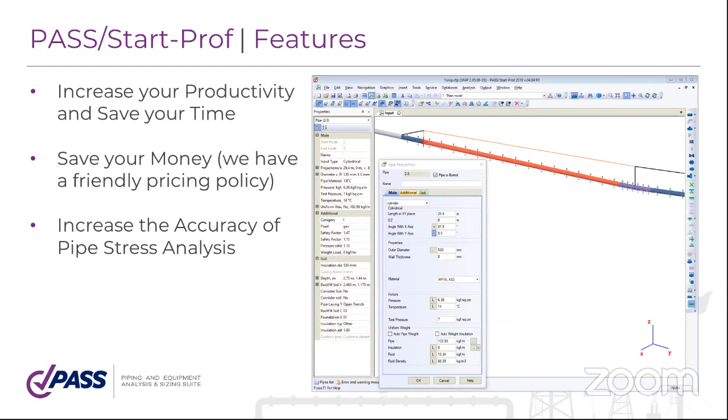PASS START-PROF is very user-friendly software, so it can increase the speed of your design and reduce costs. START-PROF software has been developed since 1965. We have about 2,000 active user companies. The user interface and documentation are in English, Chinese, and Russian. We have 32 piping codes, and 18 codes for wind, seismic, snow, and ice load automatic generation.

These are the main users, the most famous users from different industries, the most famous international users, and almost all Russian companies who design district heating networks and who produce pre-insulated pipes with polyurethane insulation, the manufacturers, including the most known and famous Mosflowline company, use PASS START-PROF software.

What are the benefits of PASS START-PROF? There is direct support from developers via email. The software is very easy to learn, very easy to use, and has a very intuitive, modern, object-oriented user interface.

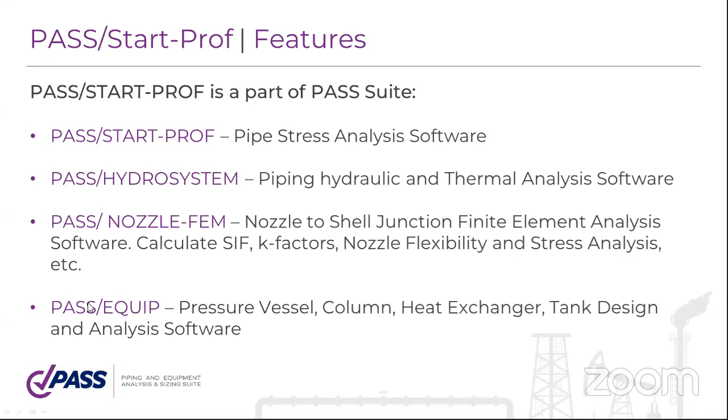PASS START-PROF is part of the PASS suite, which consists of several software products. It's pipe stress analysis software, hydraulic and thermal analysis also used for district heating network analysis, nozzle FEM, and equip for different types of equipment analysis.

PASS START-PROF is very easy to use, as I said, and it allows you to achieve results quicker, and you will spend less time for model creation and analysis of this model.

The codes widely used for district network analysis included in PASS START-PROF software, you can see here in this list. For many years we had the GOST code for district networks. Several years ago we added Chinese codes, and also in this new version we added the European code for district network analysis.

So let me quickly tell you the history of district design in Russia. Since 1965, the Nikolaev handbook was very popular for design of district networks, and it divided pipelines into several sections, like L-shaped loop, U-shaped loop, and Z-shaped loop. So district networks looked like this, as you can see in this picture.

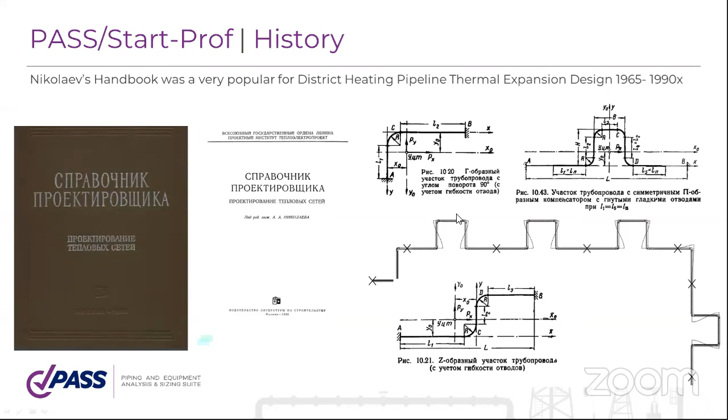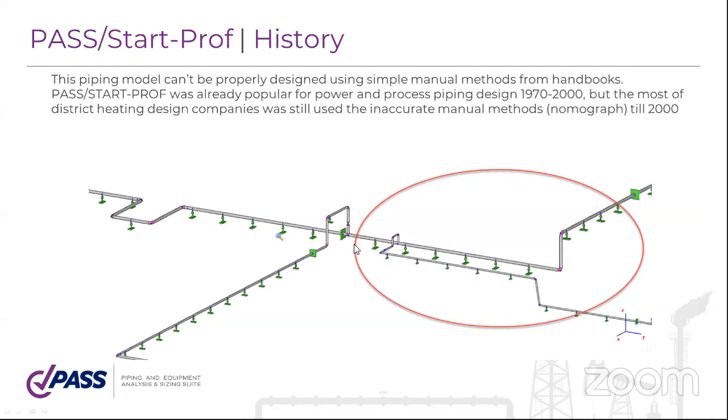Since 1998, directly buried underground pre-insulated pipelines with polyurethane foam insulation began to be widely used in Russia. Also, the Peter Randløv handbook became very popular worldwide since 1997. But complex district systems can't be analyzed using that simple method, dividing the piping system into simple components like U, L, and Z shape loops. And START-PROF software became more and more popular for design and analysis of such systems.

Also, directly buried district pipelines were impossible to analyze using the Nikolaev handbook. Most companies changed their design and used PASS START-PROF software instead. For example, the main problems usually happen with the T's, and some accidents happened too. You can see here how the T works.

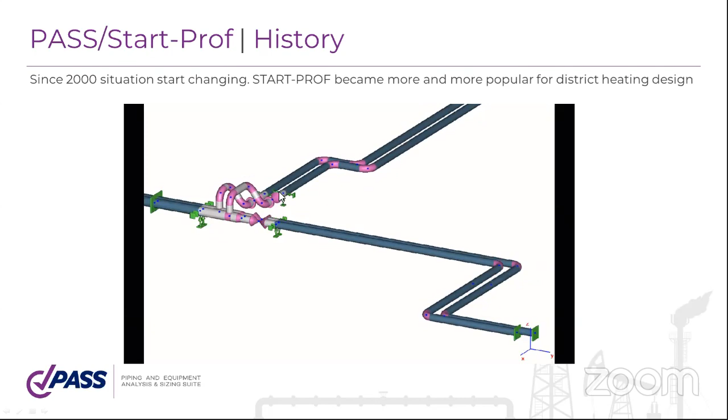This is the underground chamber with the intersection of two district pipelines. This is the stress level, and you can see we have a problem with the T element because the stresses in the T element are great. Simple manual methods can't allow you to check the stress in the T's, bends, and other elements.

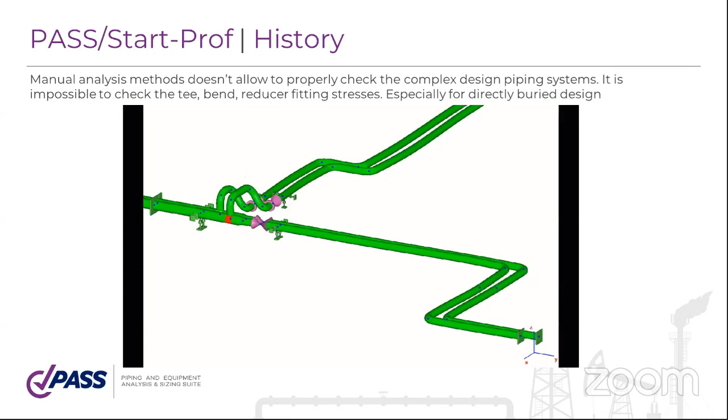And you can't check the fatigue analysis of a district network using manual methods. So some accidents happened from time to time with district networks, and many companies turned to use more accurate computer analysis design, changing their design to use START-PROF software.

Here is the example of the buried district network. In PASS START-PROF software, you can see that the soil is modeled using special soil springs. The underground chamber here has an intersection of pipelines and valves.

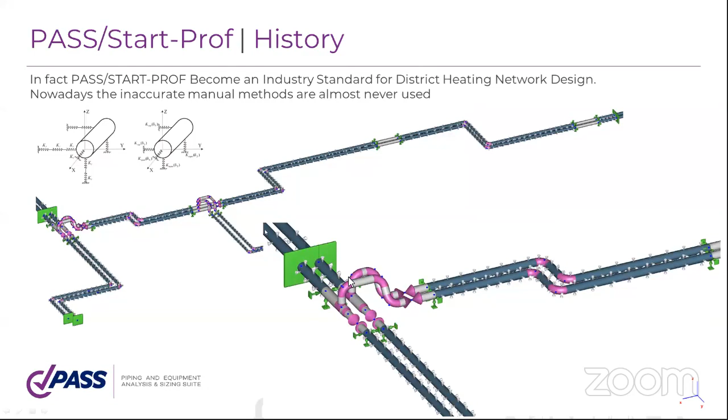There are a lot of district projects in Russia, with diameters from about 200 millimeters to 1.4 meters. Almost all district networks now are designed using the best START-PROF software in Russia, Kazakhstan, Ukraine, and Belarus.

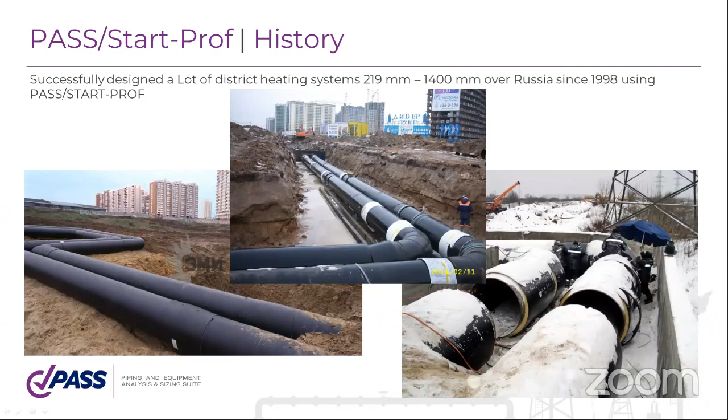Also, since 2015, China joined the society of START-PROF users, and now a lot of district heating projects in China are performed using START-PROF software. Here is one of them.

It is a long district heating network with diameter 1.2 meters, temperature 150 degrees Celsius, and pressure 1.6 MPa.

This is a very long pipeline because power stations in China are usually placed outside of the city. It is not allowed to be placed inside the city, so it is placed outside. That's why the district heating pipelines are very long.

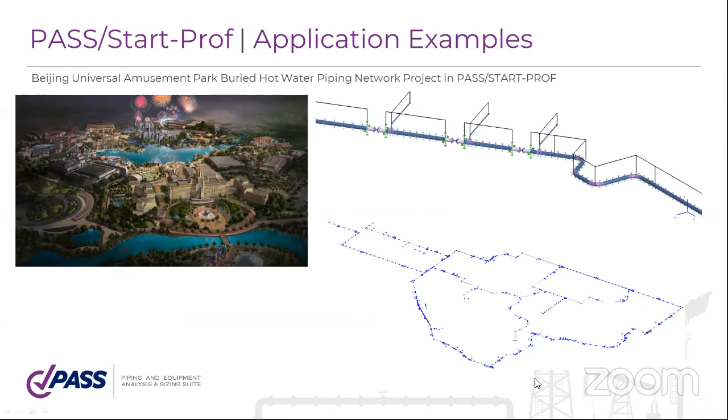Here is another example: the buried hot water piping network project that was done using START-PROF software for the Beijing Universal Amusement Park. Here is that network - it is a very huge network.

So now START-PROF is widely used in more than 800 companies in China, Russia, Ukraine, Belarus, and Kazakhstan for district heating network analysis.

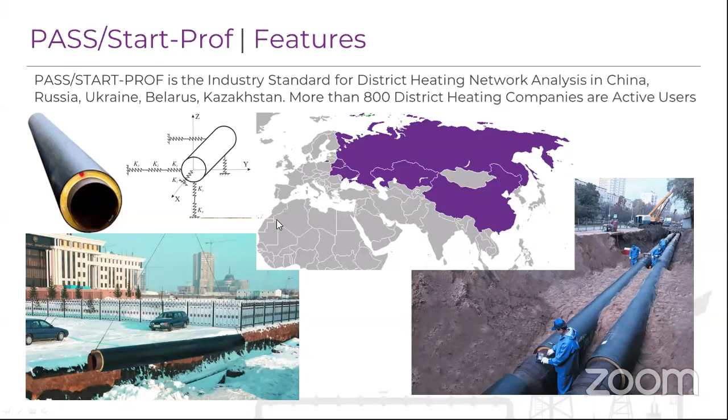START-PROF has all the needed capabilities to design and analyze buried district heating networks. We have special algorithms, nonlinear analysis of gaps, friction, one-way restraints, soil springs - everything that is needed to perform pipe stress analysis of district heating networks.

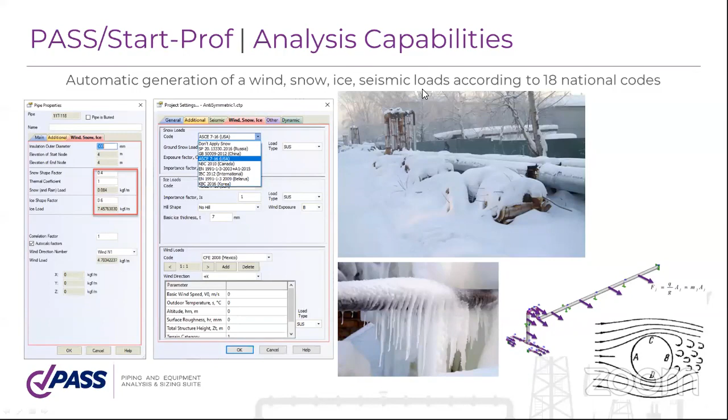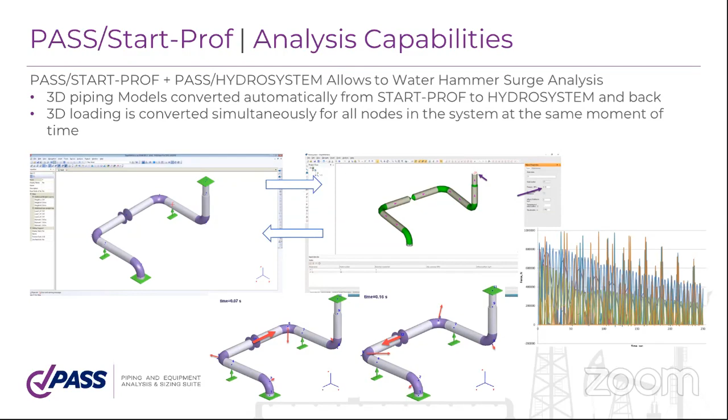We have a special generator of external loads from snow, wind, ice, and seismic effects, due to 18 national codes. Also, with integration with Hydrosystem software, we can calculate hydraulic effects like water hammer.

Let's talk about the buried model used for buried pipeline analysis in START-PROF software. The continuous soil resistance is replaced by discrete springs placed along the pipeline. To save machine time, computer analysis time, and memory, we use a special algorithm that divides the piping system into 3 zones.

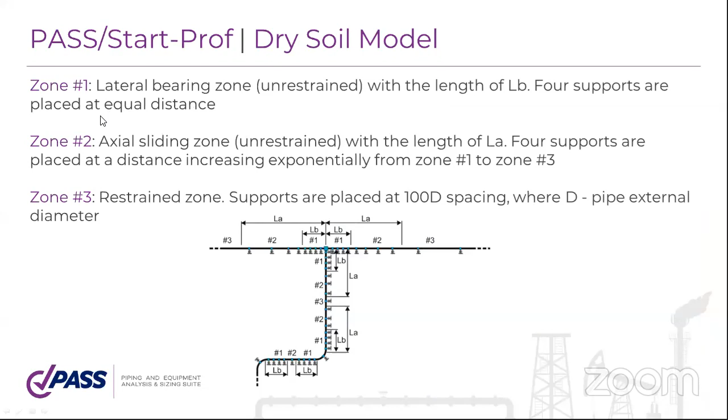The first zone is the lateral bearing zone, where the bending moments are great. The length of the zone is calculated automatically by START-PROF. We place a lot of springs in that zone, so the springs are condensed there.

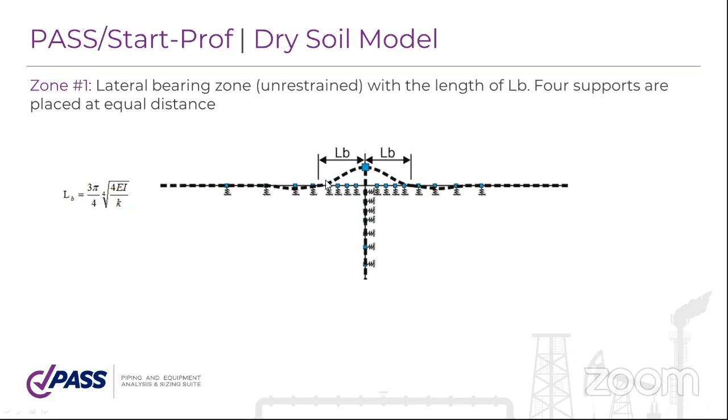The second zone, with less condensation of soil springs, is the sliding zone. START-PROF places fewer springs there, and the third zone is the restraint zone.

But actually in district heating networks, the restraint zone doesn't usually occur, because in the restraint zone, due to the high temperature of district heating networks, the stresses are usually greater than allowable. So the restraint zones usually don't happen.

It can happen only if the temperature is not so high, and special methods like a single-use compensator or preheating analysis method are used. In the restraint zone, the pipe doesn't move - the thermal expansion is zero because it is balanced by the friction forces in the sliding zone, and the pipe behaves like a pipe restrained between two anchors.

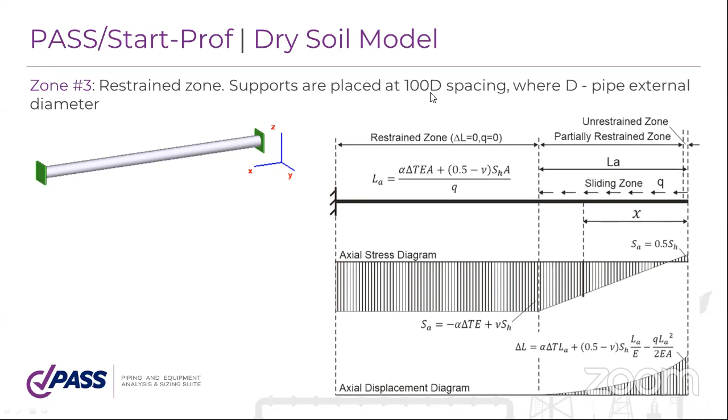In such a type of zone, START-PROF places the soil springs with a distance of 100 diameters.

Also, we have long radius pipe bends. For example, in Russia it is not used for district heating networks, but in China it is very popular because district heating networks are very long and lying near the roads, so they use long radius bends very widely.

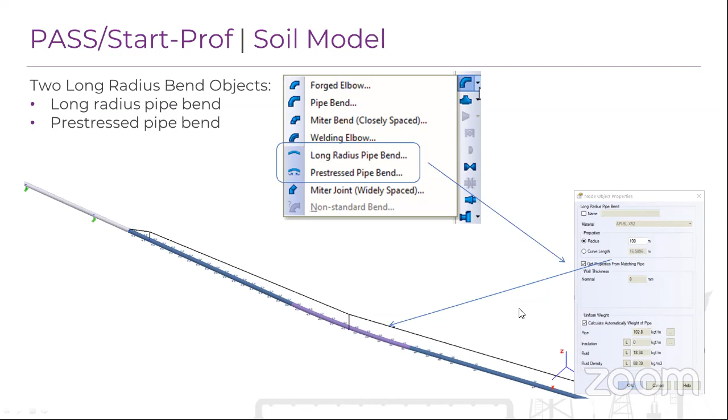We have two types of long radius bends. The ordinary long radius bend can hold its shape - if you place this bend on the ground surface, it will still remain a bend.

But we also have the pre-stressed long radius bend. If you cut this bend from the pipeline and put it on the surface, it will tend to return to its original straight form. So it has initial bending moments inside the bend that try to open it, as you can see in this picture, and this adds additional stresses in such bends.

The soil model, how does the soil spring work? We have three soil springs: longitudinal, vertical, and horizontal soil springs. The horizontal soil spring consists of three springs. First, model the polyurethane foam insulation flexibility. The second spring models the expansion cushion or expansion pad flexibility.

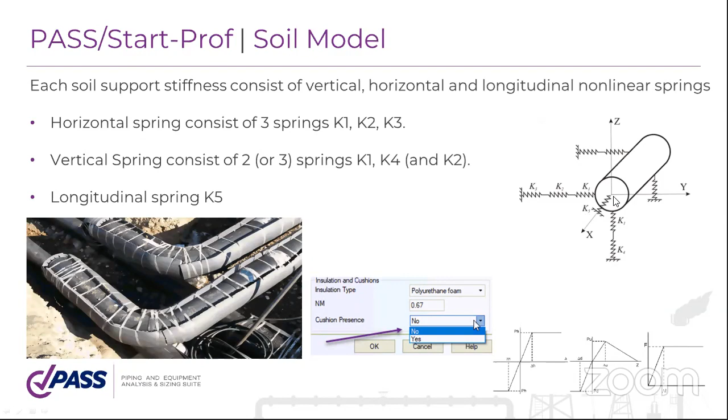In START-PROF, you can just select whether you have the cushion on this pipe or not, and START-PROF will add this spring if needed. The third spring models the horizontal soil resistance. The same situation is for the vertical spring. The axial spring doesn't have the polyurethane foam flexibility; it is just the soil flexibility along the piping, along the pipeline.

START-PROF automatically calculates the polyurethane foam insulation flexibility and automatically calculates the expansion cushion flexibility, so you don't have to care about it. You just need to select which type of insulation you're using, and whether you have the expansion cushion on this part of the pipe or not.

And about the soil model, this is the axial soil spring property that is used for modeling of the soil spring. We also have another model for district heating networks.

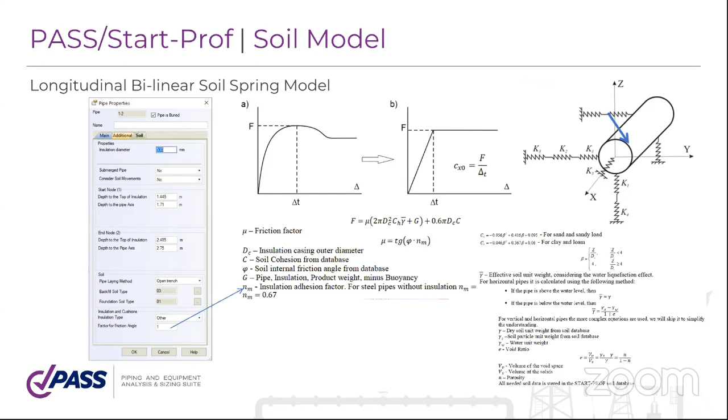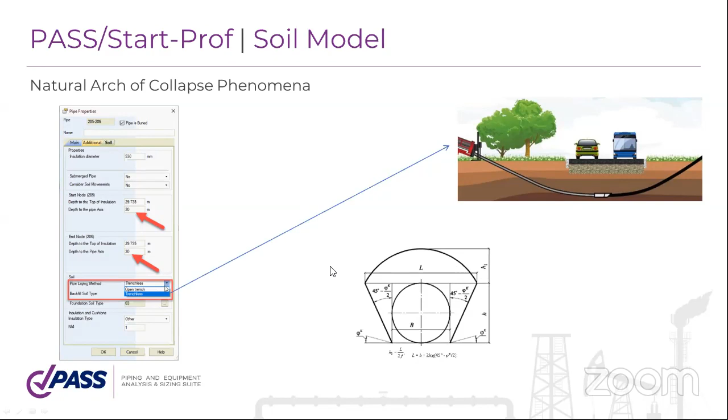START-PROF also allows you to choose which type of laying you're using: is it open trench or trenchless? If you're using the trenchless method, like horizontal directional drilling, START-PROF will also consider the special natural arch of collapse phenomena about the pipeline. This is the properties of the horizontal soil spring.

So then the pipe goes up and gets out of the soil, the soil resistance becomes 0.

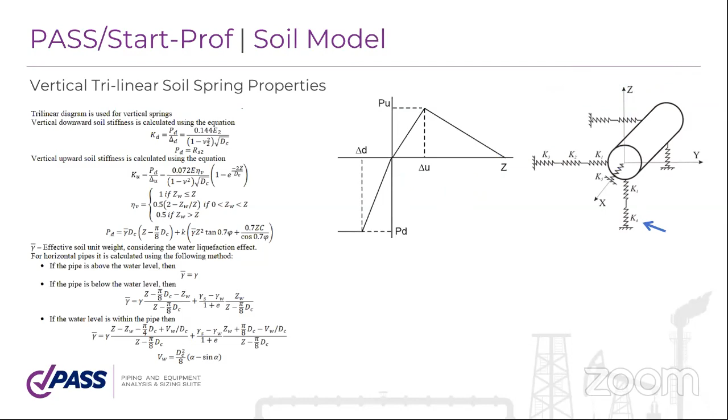START-PROF can analyze pipes with different soil depth on the two ends of the pipe. So you can specify the depth on one end and the second end, and START-PROF will model it automatically. It will calculate the properties of each soil spring automatically depending on the individual depth for each soil spring, including the vertical pipes.

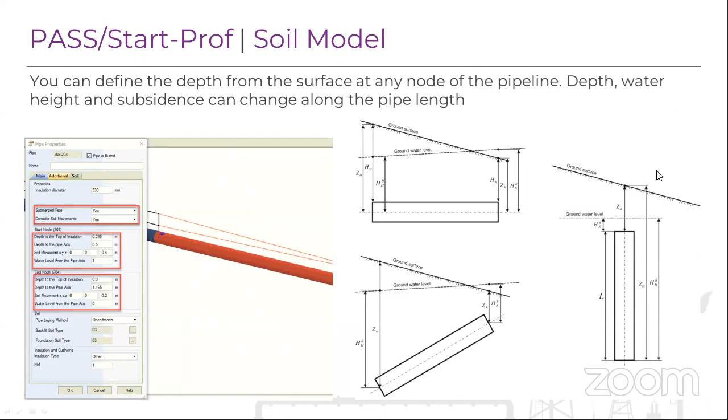Also, START-PROF model allows you to model the pipe with any angle from horizontal to vertical. It automatically converts the soil properties to model inclined pipes and vertical pipes. Most soil models are usually designed only for horizontal pipes, and some of them don't have the properties for vertical springs. So START-PROF includes a soil model that has this ability.

In one model, you can analyze both the above ground and underground pipelines in the same model, and it can consist of inclined pipes and vertical pipes, no problem. So you just need to draw your piping system, your district heating network with above ground pipes and underground pipes, and START-PROF will automatically analyze it.

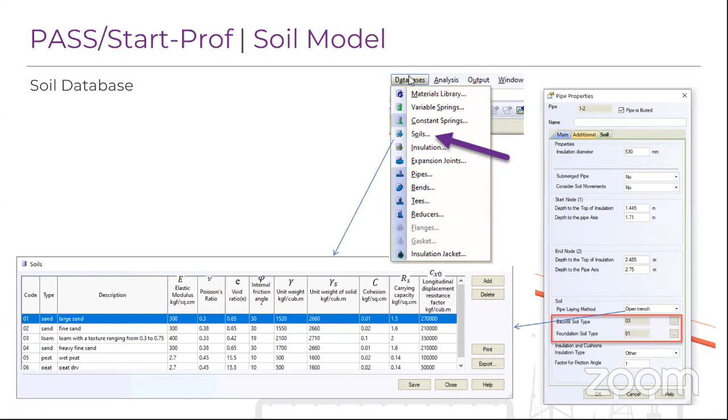START-PROF has a soil database that contains soil properties, and also has sand properties that are usually used in district heating networks.

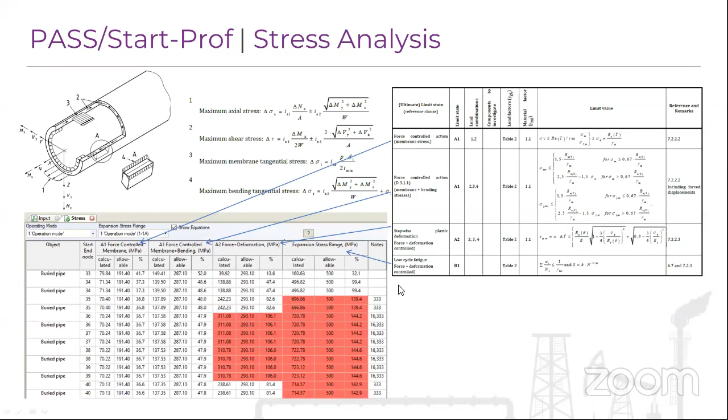Load cases are created automatically for district heating networks, so you just need to draw your piping model and run the analysis. START-PROF also checks the buckling effect according to European code, and offers you the buckling check report for all the pipes in your system.

START-PROF has the ability to enter the number of cycles for different types of pipelines: transmission, distribution, and house connections. You can enter the number of cycles, and for each pipe you can specify the type of pipeline - is it transmission, distribution, or house.

So you can analyze the whole district heating network that can include all types of pipelines: houses, distribution networks, and transmission networks. You can analyze everything in one model.

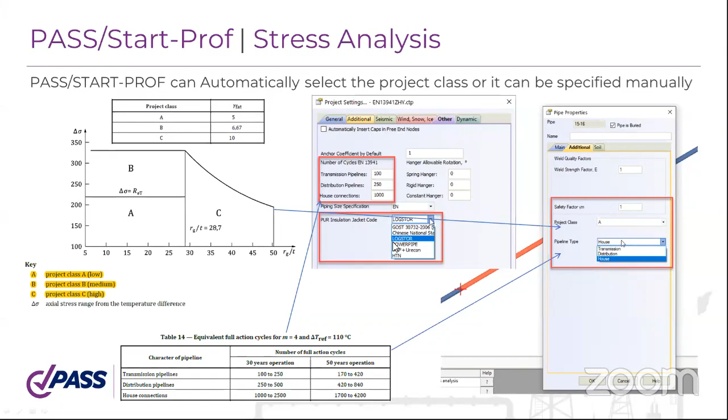START-PROF also has a database with polyurethane insulation pre-insulated pipes according to standards and manufacturer catalogs from different manufacturers: the GOST Russian catalog, Chinese national standard, and the popular LOGSTOR, POWERPIPE, and other standards.

START-PROF can analyze the ring bending stresses in the pipeline.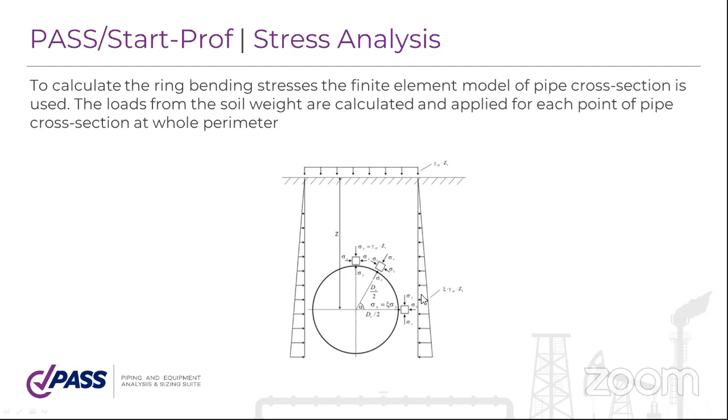To do this, Start-Prof calculates the loads from the soil pressure over the pipe perimeter, and creates a special finite element model of the pipe cross-section with the loads applied around this cross-section. This cross-section also includes the polyurethane foam insulation layer around the pipe, and it automatically considers the pressure stiffening effect, so this finite element model is nonlinear.

When the internal pressure is very high, it tends to open the pipe, making it tend toward a circular cross section, and if the pressure is zero, it became elliptical. This effect is automatically considered too. Here you can see the bending moments diagram in the pipe cross section, and this is the iteration process. How are the iterations done inside Start-Prof?

You can see here that some springs are switched off. The soil is modeled using special springs around the pipe cross section, but those springs should work only for compression. The compression happens in this zone - this is the compression zone, and this is the tension zone. In this zone, the soil springs are automatically switched off.

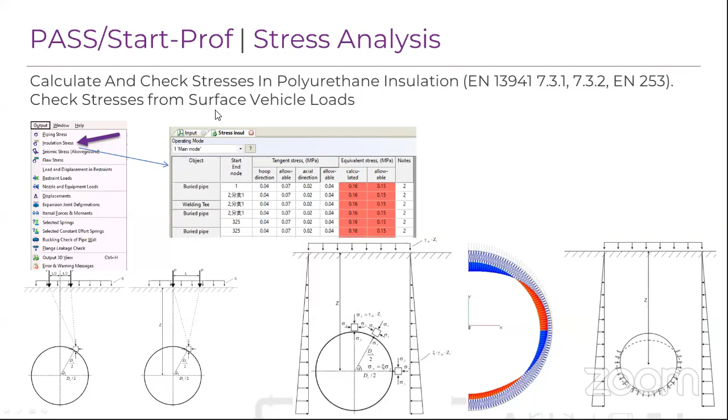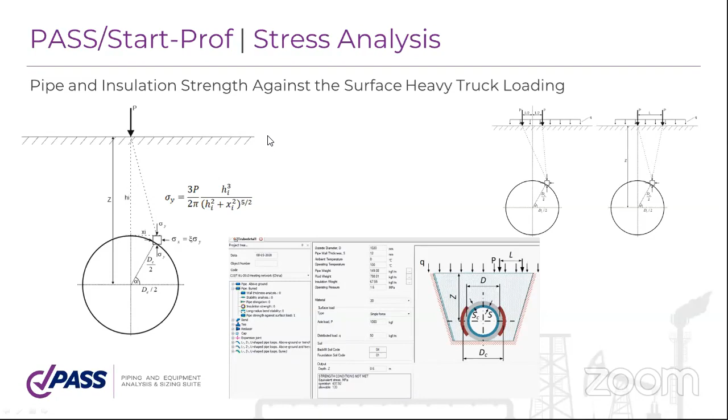Also, Start-Prof can analyze the pipe and insulation under external loads on the ground surface, for example, from heavy trucks above the pipe.

Also, Start-Prof can take into account preheating and the single-use compensator. We have a special option where you can just select which type you have - preheating or single-use compensator - so it's very easy to use. And also Start-Prof can calculate the distance between the single-use compensators.

So let me demonstrate it in the Start-Prof software. I just open Start-Prof. Here are some examples of district heating networks in Start-Prof.

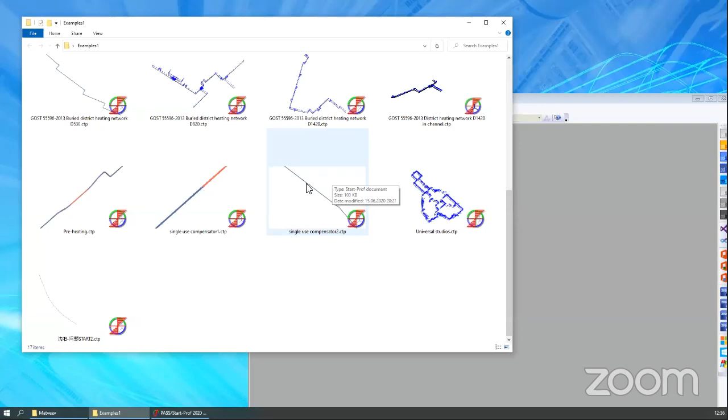Let me show you the single-use compensator model. This is a very simple model, very simple model. I choose the European code for the district heating.

I choose the single-use compensator. At this temperature, we lock this expansion joint, we weld it, and it is not working anymore after locking it.

So let's perform the analysis of this system. You can see the soil springs along the pipeline, and you can see the stress table. The stresses, according to the European code, are okay, no problem.

You can move your mouse over any cell like this, and you will see all the equations used according to the European code to calculate the stresses, and expansion stresses. So you can check all the calculations manually if you want. If you have any problems here, Start-Prof will draw this cell using red color.

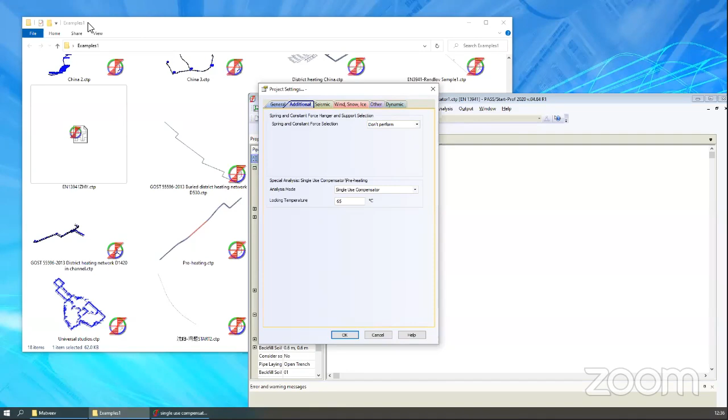Check report - here is the buckling check. Everything is okay here too, no problems. And this is the expansion joint deformations. You can see the axial deformation and allowable deformation of this single-use compensator.

So let's remove the single-use compensator here. I will remove it from this model and run the analysis again without the single-use compensator. Now you can see that we have problems with the stresses. Let's check buckling - we have a problem with buckling, so the single-use compensator helps us a lot.

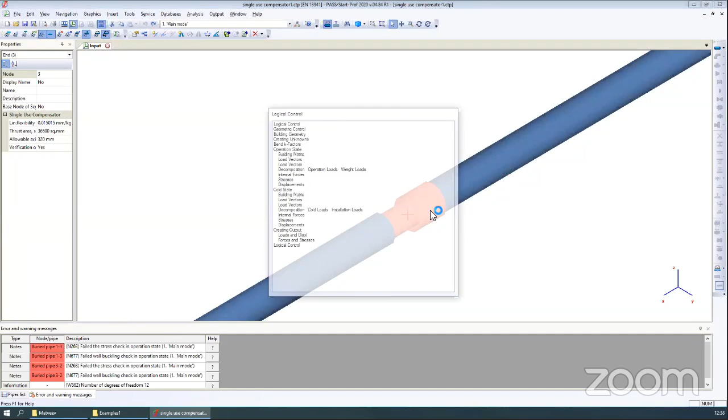Also, I undo changes, bring back the single-use compensator, and let me change the locking temperature. I can change it from 65 degrees to, for example, 20 degrees. Run the analysis.

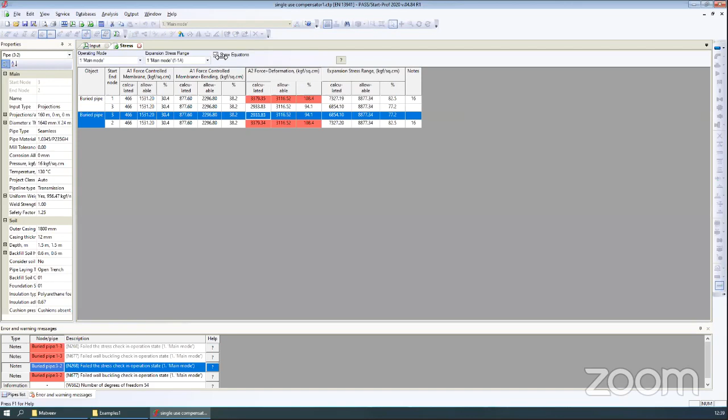And you can see that we also have some problems with stresses. So the locking temperature should be the temperature between the installation temperature and operation temperature, divided by 2, like this. This temperature is the locking temperature of the single-use compensators.

Another example is a preheating analysis. This is the sample model that can demonstrate how to perform the preheating analysis. Here the preheating method was chosen.

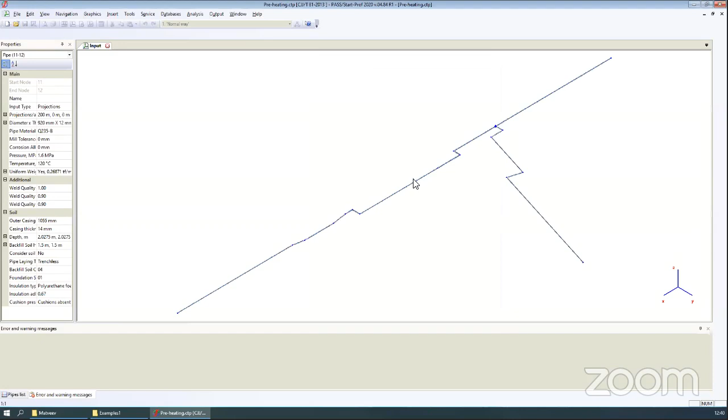And in the operation mode editor, we have two operation modes. The first mode is without preheating, and the second mode is with preheating. There is no preheating here, and here is preheating. We can compare the two modes and compare the results. The analysis is already done, so I will just show you the results - this is the stresses. Oh, they were cleared, so I need to run the analysis.

Okay, analysis is done. This is the deformed shape of this pipeline. This is the first one, analyzed the normal way without preheating. You can see the installation state, operation state, and cold state.

Now if I change the mode to preheating, you can see different results. This is the installation state, operation state, and cold state. As you can see, the difference between this preheating case and the one without preheating.

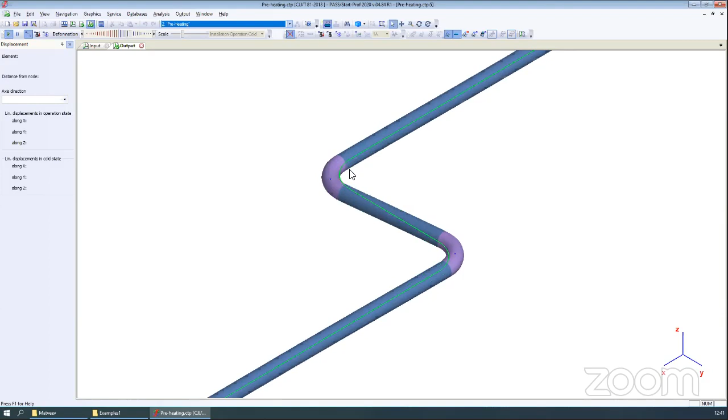The difference is significant, so all models are calculated with preheating. Now let's check results. Here is the normal way - we have a problem with stresses, and also a problem with buckling stresses. But if we change to preheating, all the problems are gone.

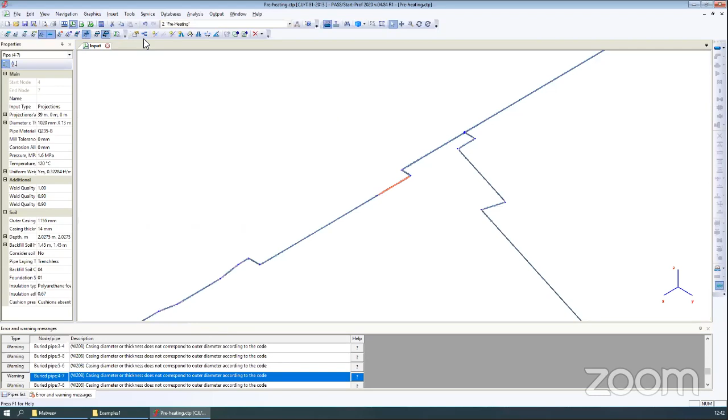No problems now. Let's check stress in the normal way - we have a problem. With preheating, no problem. So preheating helped to reduce the stresses and support loads in the piping system, and it is very easy to activate in Start-Prof.

Let me show you another example - this is the Universal Studios in Beijing heating network, Beijing, China, for Universal Studios Park. It is a very huge heating network.

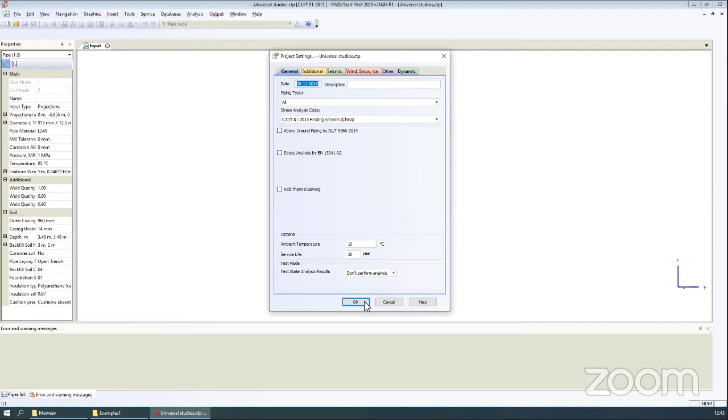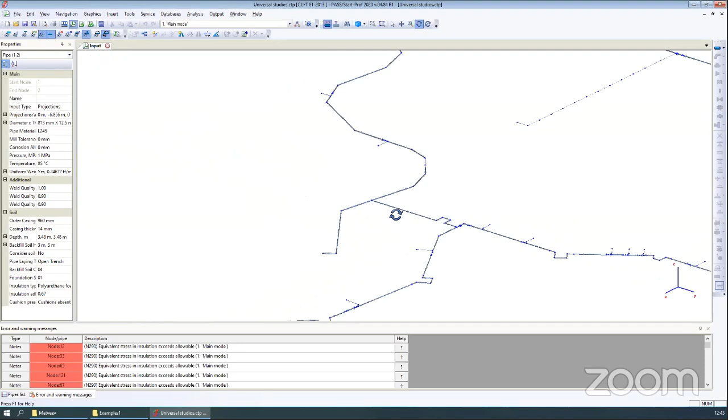Okay, this is the heating network, very huge. You can see the expansion joints here, expansion loops here, the valves. This is not the final results in the final system - connections like this were used everywhere, but this is just intermediate results. Connections like this are not working for district heating networks, so this is not the final version of this network.

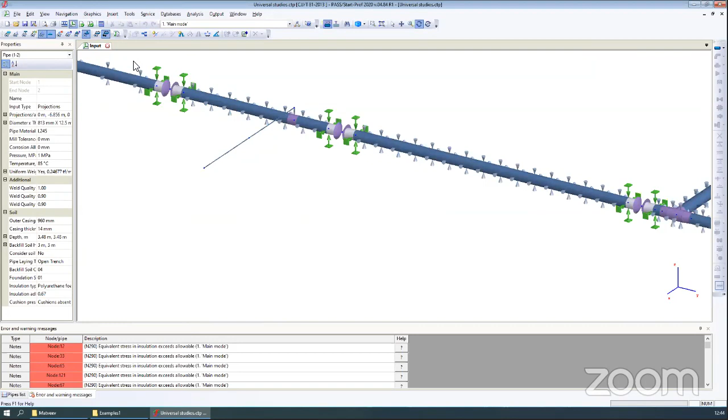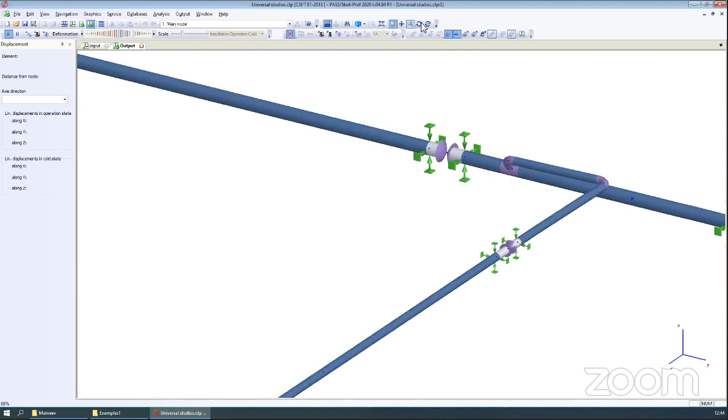We turn to that type of connection at every point. Let's also check the deformed shape of this network. I remove the installation state line, and we can run analysis - this is the deformed shape of that district heating network.

We can also check the insulation stresses. They are not passing right now because, as I said, this is not the final version of this model. In the final model everything is okay, but here we have a problem with equivalent stresses in insulation.

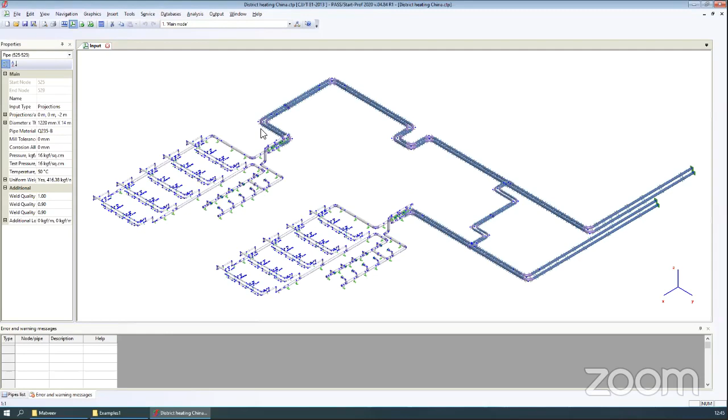We have a lot of other examples - let me show you just one more. This is the district heating network pump station in China, analyzed using Start-Prof software. Let me show you the soil surface above the underground part.

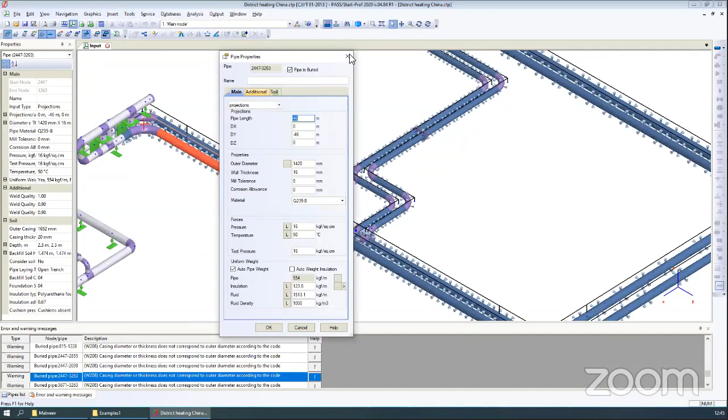And this is the above ground part - the pump station. There are a lot of pumps here. Let me show you the diameter of this pipe - you can see the diameter is 1.4 meters, a very huge diameter pipe.

It was analyzed using Start-Prof, and the cross sections are done automatically in Start-Prof. Now I will show you the deformed shape of this hidden system.

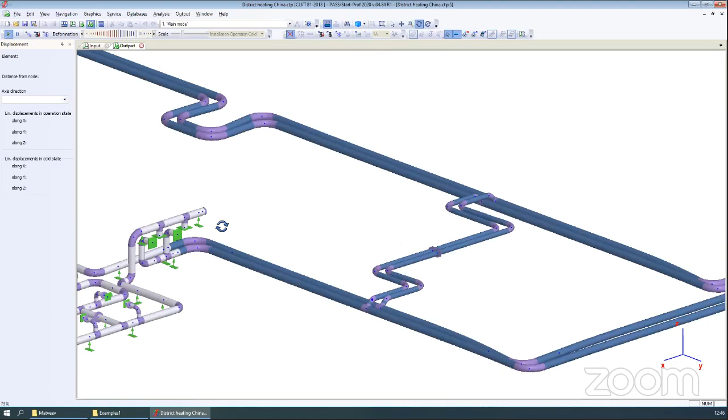This is the pump station, and this is the underground network. This is not the final model - in the real model we have a very... I don't have the final model of this piping system.

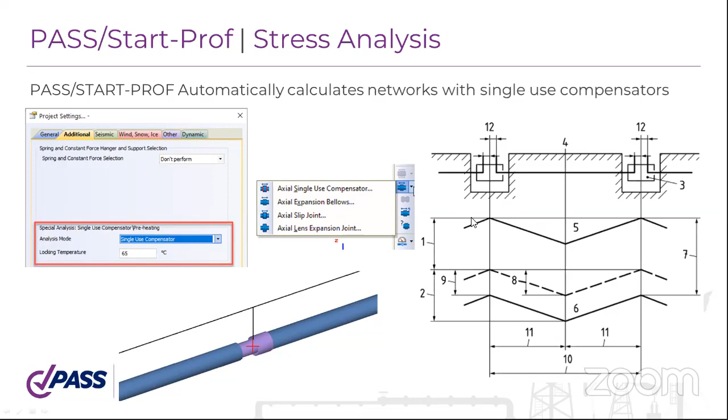Okay, let's return to our slideshow. Here is the diagram of the stresses or axial forces in the pipeline, then using single-use compensators, and the diagram when we use preheating.

Also, Start-Prof automatically uses full friction for hot load and half friction for cooling. So we automatically analyze it, and this adds an additional safety margin because the expansion stress range becomes greater.

And Start-Prof automatically calculates the cold state. For example, we have installation state, operation state when the pipe heats up, and when the pipe cools down it never returns to the original installation state because the friction forces change direction. In cold state we will still have very huge friction forces, especially for buried piping systems, for underground piping.

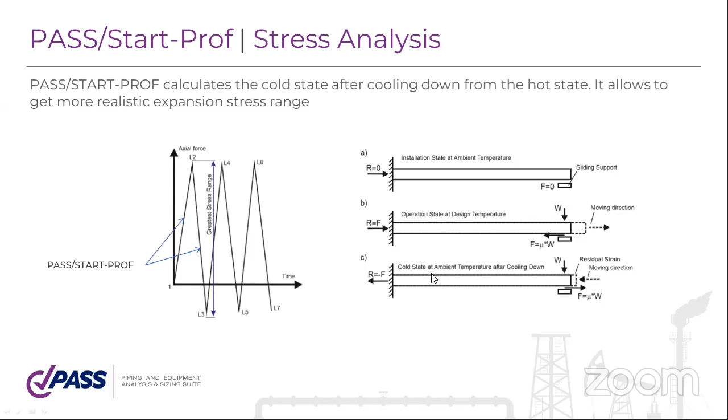This is very important to calculate the accurate stress range, so Start-Prof does this automatically, and this is especially important for district heating networks. This is the expansion range between installation state and operation state, and this one is the expansion stress range between cold state and operation state, which is the greatest. So we need to consider the friction forces in the cold state of the piping system.

We have a database with insulation diameters of the most famous manufacturers of district heating pipelines.

Like the Russian GOST code, because all the manufacturers in Russia follow the GOST code. The second one is China's national standard. And the next one is LOGSTOR, POWERPIPE, and others.

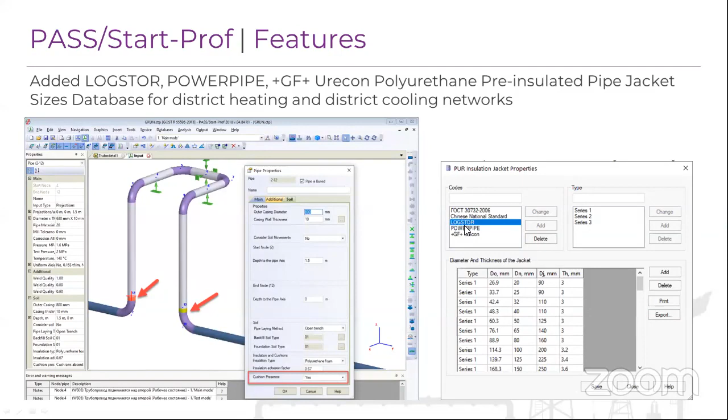We have a material database that includes all the European materials, including the materials used for district heating network design. This database contains the properties of the material depending on the wall thickness that is required by the European standards. So Start-Prof will automatically select the appropriate material properties depending on the wall thickness. You don't have to do this manually. Just select the material and select the manufacturing method, seamless or welded, and Start-Prof will automatically consider everything else.

Also, Start-Prof can analyze some special effects like soil subsidence, landslides, and seismic fault crossing. This was very important for China because there are a lot of seismic zones and district heating networks cross those zones, so Start-Prof allows you to do that. You can define the soil movements at the beginning of the pipe and at the end of the pipe in any direction, and use it to model the effect that you can see here.

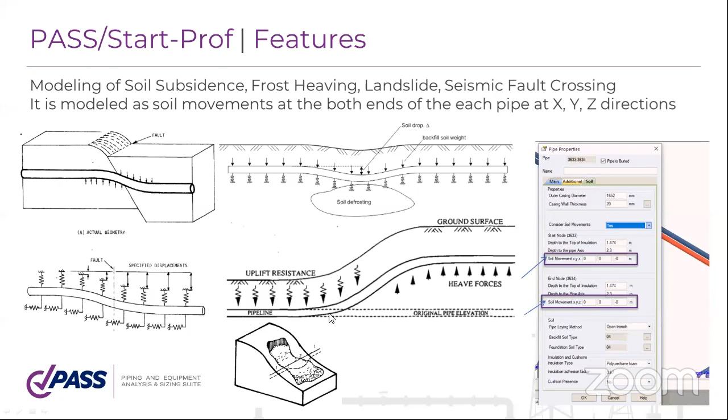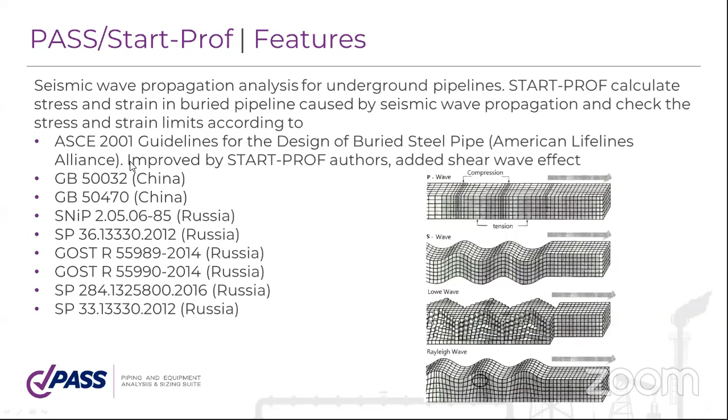Also, in the latest version, Start-Prof can analyze the seismic wave propagation effect according to several standards, including the Chinese standards, United States standards, and Russian standards. You just need to select the seismic analysis and select the buried pipeline seismic analysis. So Start-Prof can now perform the seismic analysis for buried pipelines, for underground pipelines. You just need to select the standard.

What is the wave propagation effect? When you have a long pipeline, the P wave, which is a longitudinal seismic wave, passes through the soil and causes forces in the pipeline. It has compression zones and tension zones. The friction forces between the pipeline and the soil reduce this effect, making it much better. Start-Prof uses these equations to calculate the strain in the pipeline during the seismic wave propagation.

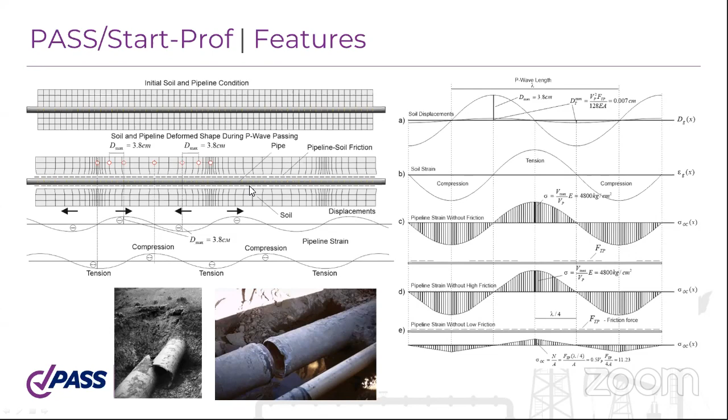Especially the most important points are the branches of the pipeline, because the branches can't slide along the soil. The friction forces can't help, and it moves along with the soil during the passage of the seismic wave along the pipeline. So most of the problems happen in the branches. Start-Prof allows you to design the branch which will hold against the seismic wave.

This is the method used for seismic wave analysis. You can specify the peak velocity value, peak ground acceleration, apparent propagation velocity of the P wave, and of the S wave. How to define these values, you can find in our help system. You can just open our help system and find the answers to your questions there.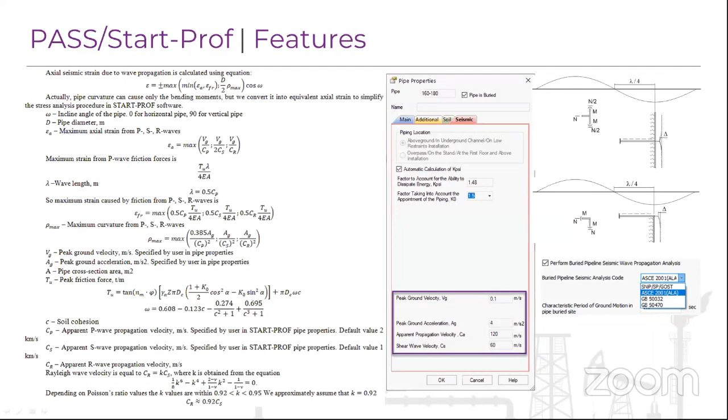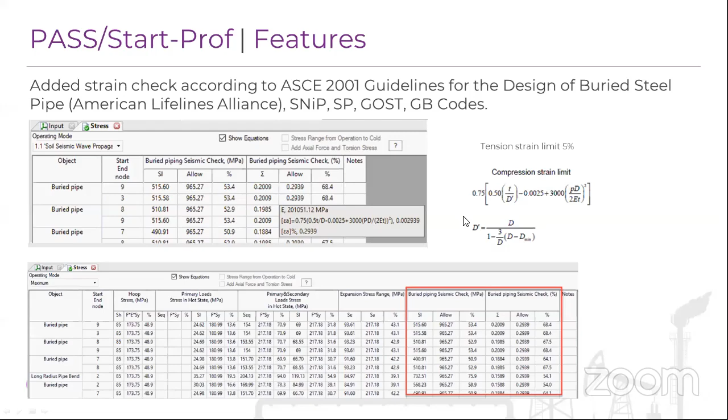After the analysis, START-PROF allows you to automatically check the strains in your pipeline according to several standards. So if you choose the ASCE code, START-PROF will check using the ASCE code. If you choose the Chinese or Russian code, START-PROF will use those codes for checking the seismic wave propagation effect.

Okay, so now let's talk about START-PROF usability. The START-PROF software is object-oriented, and you can build your piping model from objects like Lego. The objects can be pipes. For pipe objects, you can define different coordinate systems. It can be projections, or it can be a cylindrical coordinate system that is more convenient for use in district heating networks.

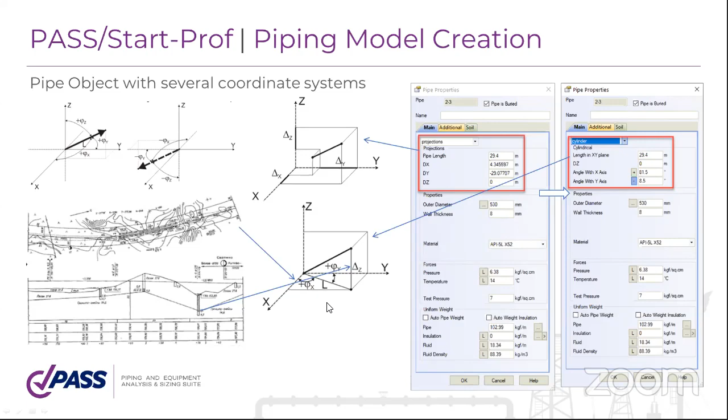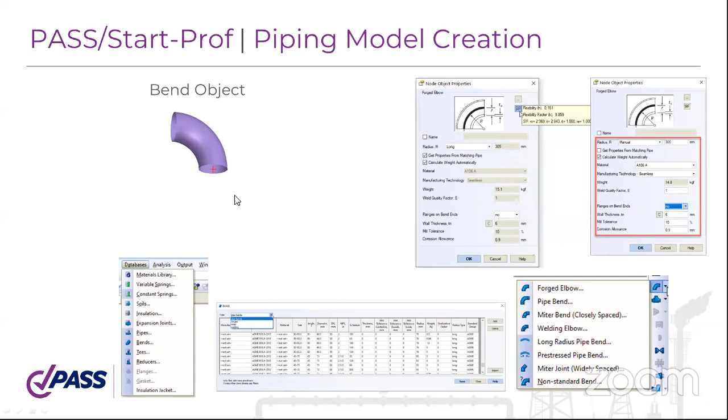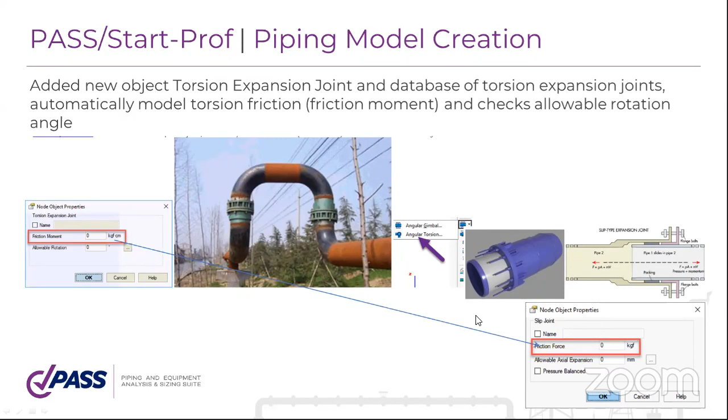You can also select any type of object, for example a bend object, and put it in the START-PROF model. We have tee objects, reducer objects, valve objects, pump objects, expansion joint objects. A special type of expansion joint is the torsion expansion joint with friction moment, and the slip joint with friction force, which is widely used in district heating networks. We also have a flange object that automatically checks flange leakage.

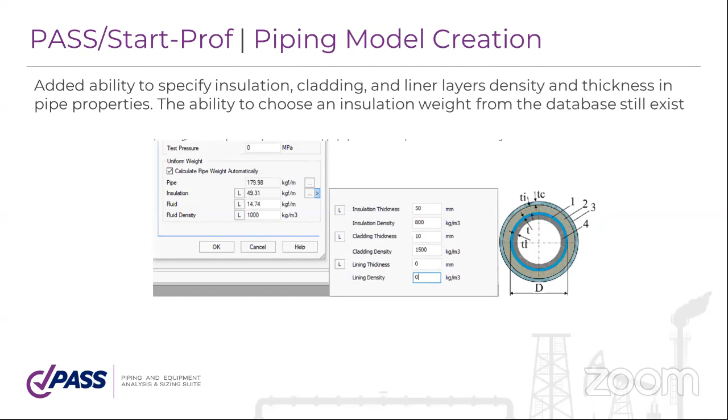START-PROF can consider the insulation weight automatically if you input the insulation thickness and density, or you can choose the insulation from the database. For example, this database contains insulation weight for district heating pre-insulated pipe manufacturers.

We have all the needed types of supports in START-PROF. We also have a non-standard support that consists of 6 supports: three rotational and three linear restraints, and you can create your own support and then copy it. It will be one object containing several restraints inside.

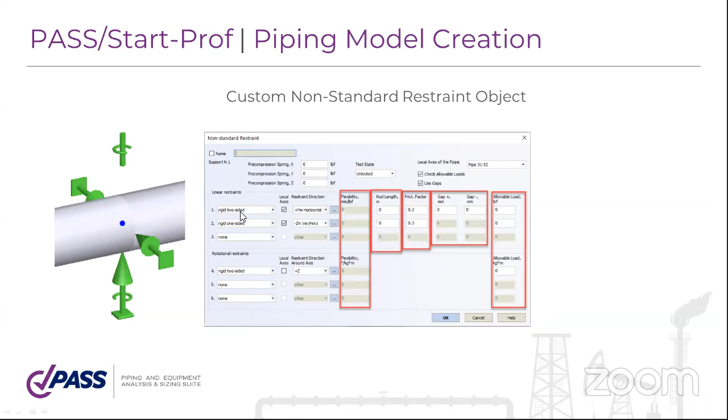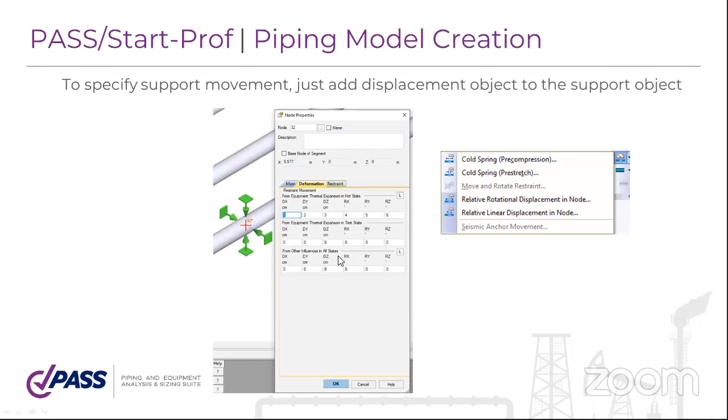You can easily define the displacement of the supports. You don't need to use any special tricks, you just add the displacement for a support and START-PROF will take it into account. You can also define the cold spring, which is widely used for district heating networks too, especially for above-ground district heating networks. So you can easily add the cold spring.

START-PROF allows you to calculate the wall thickness of the pipe, the wall thickness of the bend element, and of the reducer according to the district heating codes.

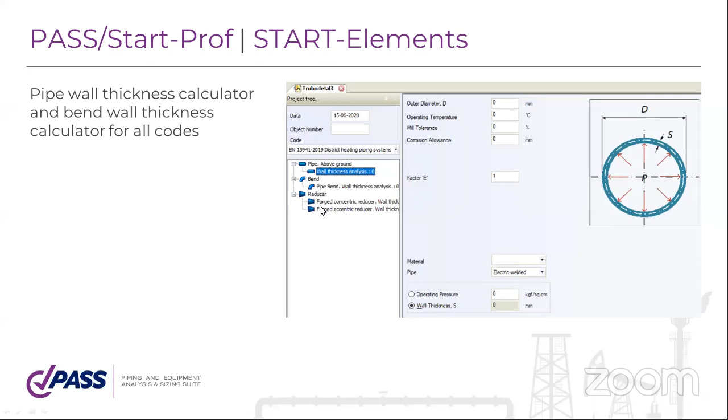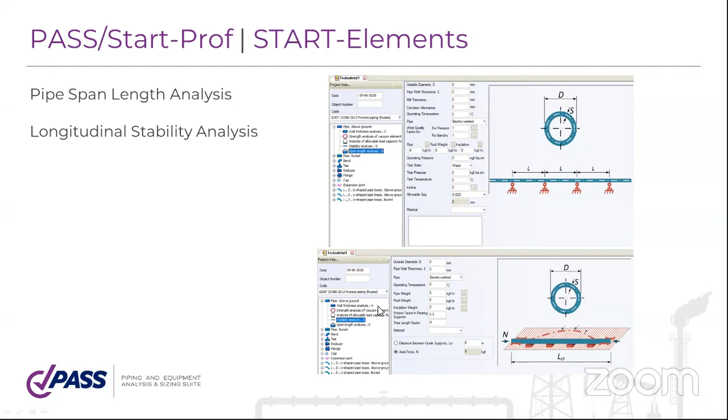You can analyze the distance between supports, the stability analysis, the buckling analysis. You can check the stress insulation for buried pipelines.

We also have a special feature, especially for district heating networks. Some companies like manual methods, like Nikolaev's handbook, LOGSTOR guidelines, and other handbook guidelines. They have special equations for how to calculate U-shaped loops, Z-shaped piping loops, and L-shaped piping loops. START-PROF allows you to do the same job, but using the finite element method. You just select the type of your piping loop, specify all needed values, and START-PROF will calculate it.

Sometimes companies use this for quick estimation of the heating network, but after this quick estimation, they perform the real analysis using the main core of START-PROF for pipe stress analysis.

Here are the reports you will receive after the analysis: pipe stress, insulation stress, seismic stress, flaw stress, restraint loads, nozzle and equipment loads, displacements, and expansion joint deformations. START-PROF will automatically check the expansion joint deformations, the buckling check, and the flange leakage check.

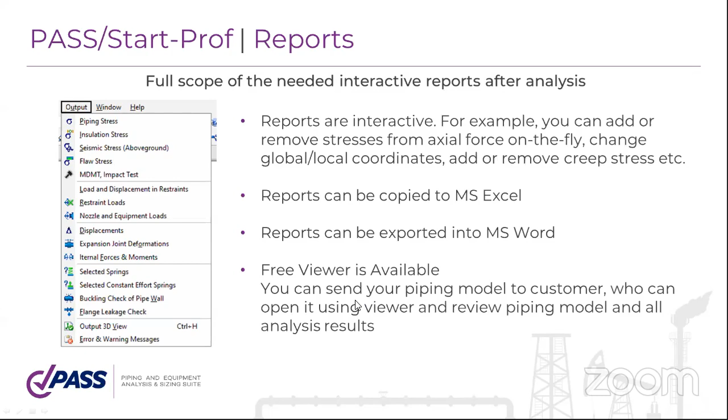This is how interactive reports look like. This is the loads report, displacement. You can easily check the axis from global axis to pipe support axis, or pipe local axis.

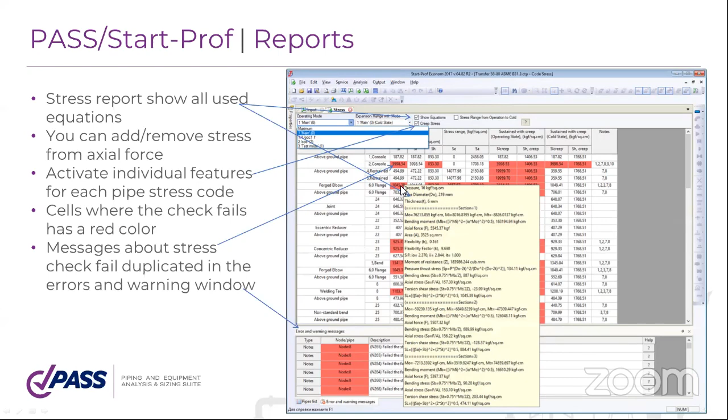Here are the stresses. You can move your mouse, and as I already shown you, you will see all the equations that were used to calculate stresses.

They have special error and warning messages, and your goal is to remove all the red messages from this window. This means you don't have any problems anymore. If you see red messages, this means you have some problems in your system. The messages happen before or after the analysis.

This is a feature that many expert companies who approve district heating network designs in Russia like very much, because they just ask the design companies to offer the START-PROF project file to them, and then they run this file using the latest version of START-PROF, and if they don't see any problems here, they are satisfied.

Also, they check the design of the heating network in START-PROF, and they check the accuracy of the input data in START-PROF, how accurately the piping system was modeled, and if everything is okay, they approve the design project of the district heating network.